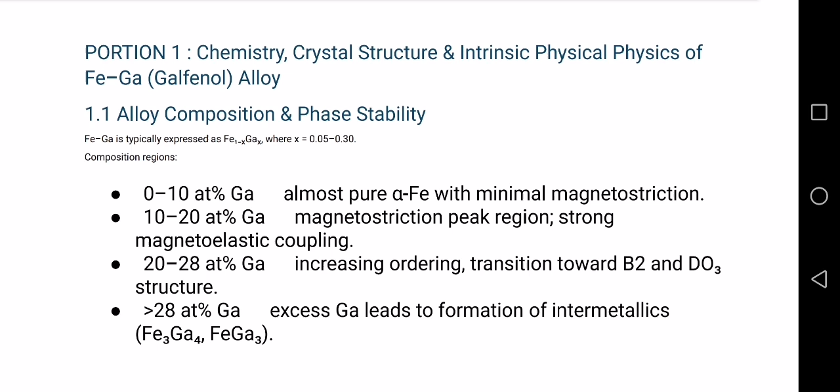We will see the alloy compositions. First I'll talk about the different composition regions. At 0 to 10 atomic percent gallium, the structure is almost pure iron, and magnetostriction is very small here.

When it's 10 to 20 atomic percent gallium, this is the best composition range. Magnetorestriction is maximum and magnetoelastic coupling is very strong.

At 20 to 28 atomic percent gallium, atomic ordering starts to increase, and the structure changes toward B2 and DO3 phases. Magnetorestriction starts to decrease, and if we have more than 28 atomic percent gallium, unwanted intermetallic compounds form like Fe3Ga4 and FeGa3. These phases damage magnetostriction behavior.

For practical application, 17 to 19% is preferred. Now we will see chemical and electronic structure effects.

Gallium changes the electronic structure of iron. The main electronic effect is a weakening of iron-iron interaction. This happens because gallium atoms replace some iron atoms, which makes the magnetic moments more easily able to rotate.

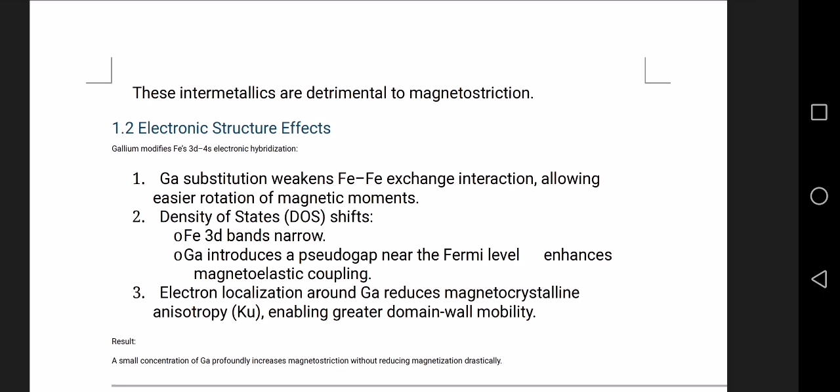Reduced magnetic anisotropy occurs as electrons become more localized near gallium atoms. Magnetocrystalline anisotropy decreases and domain walls move more easily. Finally, even a small amount of gallium greatly increases magnetostriction without significantly reducing magnetization.

Now, the crystal structure of FeGa alloy. It has a body-centered cubic, BCC, structure. Depending on the gallium arrangement, three types of structures appear.

The A2 structure is disordered BCC, where gallium atoms are randomly placed in the iron lattice. This structure shows the highest magnetostriction, easy domain wall motion, and strong mechanical strength. This is the most desired structure for applications.

The next structure is the B2 structure, partially ordered. Gallium atoms in this structure start to occupy specific lattice positions. Structural stability improves and magnetostriction slightly decreases, usually after controlled heat treatment.

Next we have the DO3 structure, which is fully ordered. This structure is similar to Fe3Ga. Atomic order is very strong in this structure. Magnetorestriction becomes low because the domain walls cannot move freely. Internal stresses increase, and this structure is not preferred in magnetorestrictive devices.

Now, why does atomic ordering reduce magnetostriction? This is because magnetostriction is high when domain walls move easily and the lattice is soft and flexible. DO3 ordering causes antiphase boundaries, internal stresses, and strong domain wall pinning.

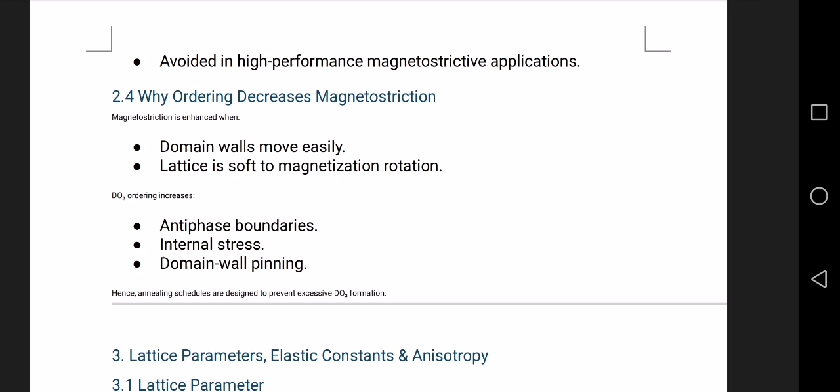Now we have the lattice parameters, elastic constants, and anisotropy. The lattice parameter for FeGa with about 20% gallium is 2.90 to 2.92 angstrom. Pure iron has a smaller value, 2.866 angstrom. Gallium increases the lattice size, which reduces elastic stiffness and makes deformation easier.

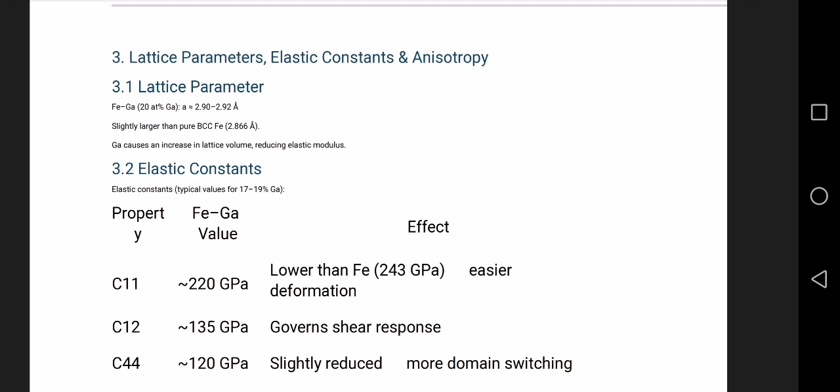Elastic constants of FeGa alloy: typical values for 17 to 19% gallium. C11 is 220 GPa, lower than pure iron, which allows easier deformation. C12 is approximately 135 GPa, which controls shear behavior. C44 is 120 GPa, slightly reduced, and helps domain switching.

Now the overall effect: lower elastic constants mean less energy is needed to create strain, and this leads to higher magnetostriction. To conclude, FeGa alloy is chemically simple but physically powerful.

Small gallium addition greatly improves magnetostriction, and the disordered A2 structure is the best one. Atomic ordering and intermetallics reduce performance. A soft lattice and low anisotropy enable a strong magnetoelastic response.

Now moving on to the next topic, we have magnetostriction physics in FeGa in depth.

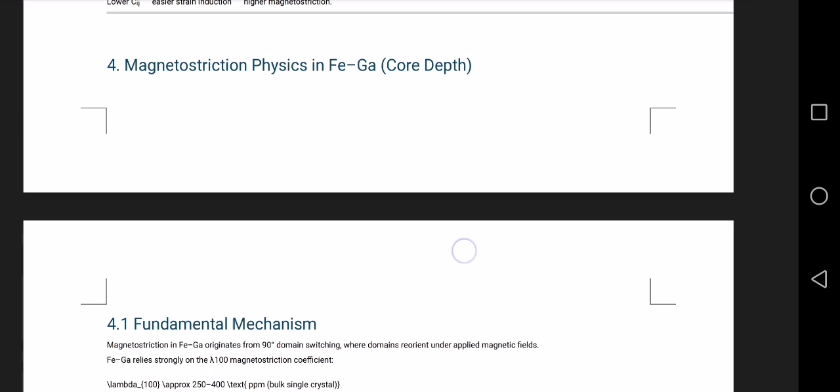Now everyone, this is the heart of today's topic, so please focus carefully. We are going to understand why FeGa alloys show such high magnetostriction. Magnetostriction in FeGa mainly happens because of 90-degree domain switching. Let me explain what this means.

Inside the material, magnetic domains are already present, each with magnetization in a certain direction. When we apply a magnetic field, domains aligned with the field grow, and domains at 90 degrees rotate and reorient. This 90-degree rotation produces a large strain in the lattice.

Remember this important point: FeGa is dominated by the lambda 100 magnetostriction coefficient. This means maximum strain occurs along the 100 crystallographic direction.

For bulk single crystal FeGa, lambda 100 is approximately 250 to 400 parts per million. This is extremely high for an alloy without a rare earth element.

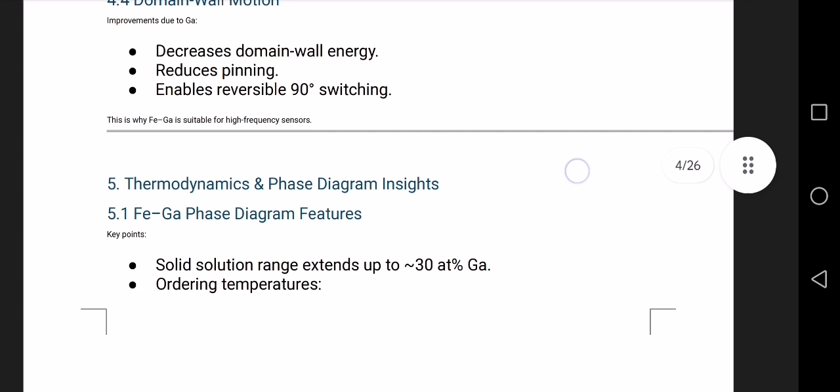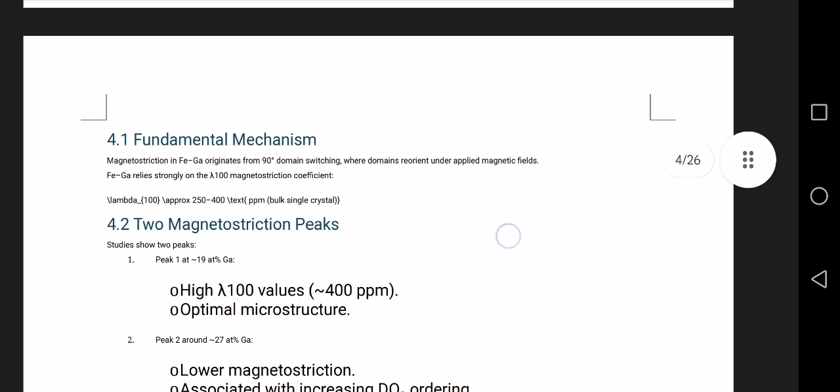Now we're going to discuss magnetocrystalline anisotropy in FeGa, denoted as K1. For FeGa, K1 is approximately 2 to 8 x 10^4 joules per meter cube. This value is much lower than many magnetic materials.

Now let's see why K1 is important. Because K1 is low, magnetic moments rotate easily, less magnetic field is required, and magnetostriction occurs at low excitation. So low K1 leads to high sensitivity and low power requirement. This is very important for zero power sensors.

Now we will discuss domain wall motion in FeGa. Gallium improves domain behavior in three main ways. Let us discuss these three main ways.

First, domain wall energy decreases, so walls move easily. Pinning centers reduce, giving less resistance to motion. Reversible 90-degree switching becomes possible, and high frequency response is achieved. That is why FeGa works very well in high frequency sensors and harvesters.

Now we have thermodynamics and phase diagram insights. Let us look at the important features of the FeGa phase diagram.

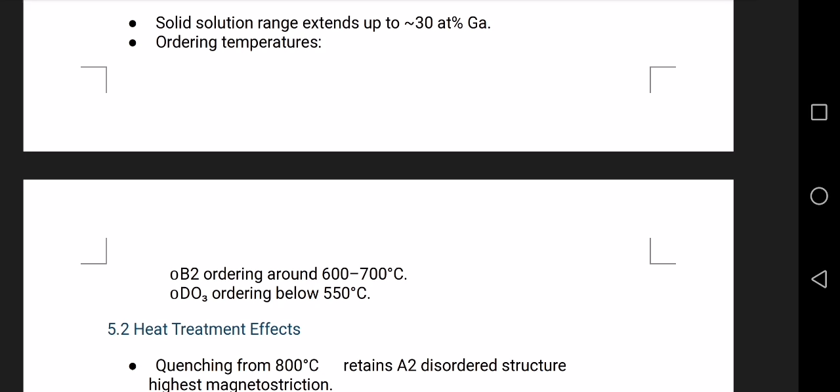The FeGa phase diagram shows that solid solution exists up to 30% gallium. Atomic ordering depends on temperature: B2 ordering starts around 600 to 700 degrees C, and DO3 ordering starts below 550 degrees C. From this data we know that temperature control is extremely important.

Now we will discuss the effect of heat treatment, which strongly controls magnetostriction. Quenching from 800 degrees Celsius retains the A2 disordered structure, giving the highest magnetostriction. Annealing at 400 to 500 degrees C gives limited DO3 ordering and moderate magnetostriction. Long annealing at 350 to 450 degrees C gives excessive DO3 ordering and a severe drop in lambda 100.

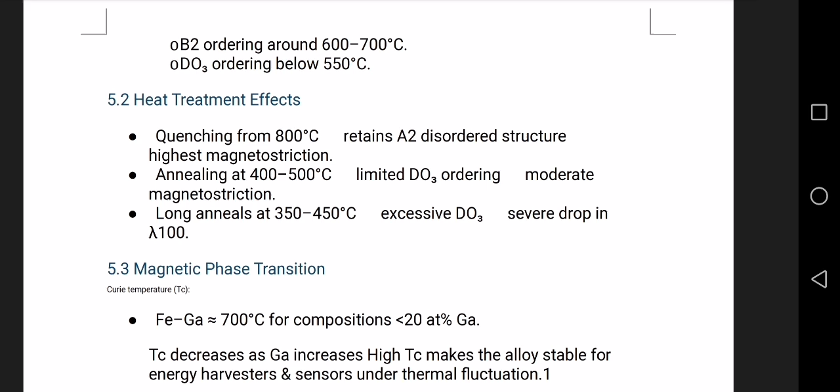Now we will see the magnetic phase transition. Let us talk about Curie temperature, Tc. For FeGa, Tc is approximately 700 degrees C for compositions below 20% gallium. As gallium content increases, Tc slowly decreases.

Why is high Tc important? Because materials remain magnetic at high temperature, making them stable under thermal fluctuation. This is excellent for energy harvesting in sensors.

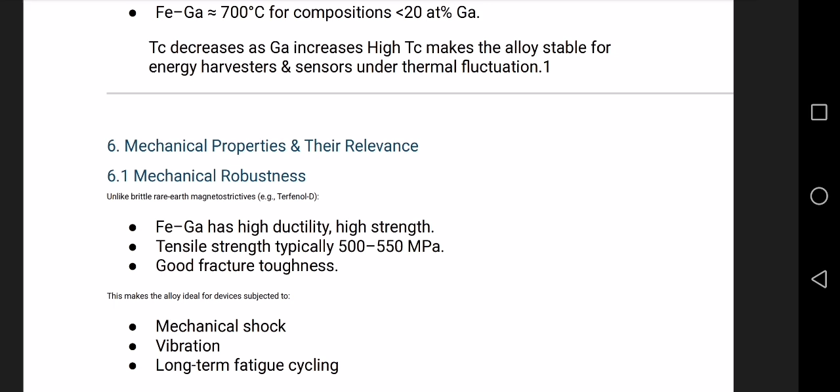Now we have mechanical properties and their importance: mechanical robustness. Let us compare FeGa with rare earth magnetostrictive materials. Unlike brittle materials like Terfenol-D, FeGa has high ductility, high strength, and good fracture toughness. Typical values are tensile strength 500 to 550 MPa, yield strength 320 to 350 MPa. This means FeGa can survive real world conditions like mechanical shocks, continuous vibration, and long-term fatigue loading.

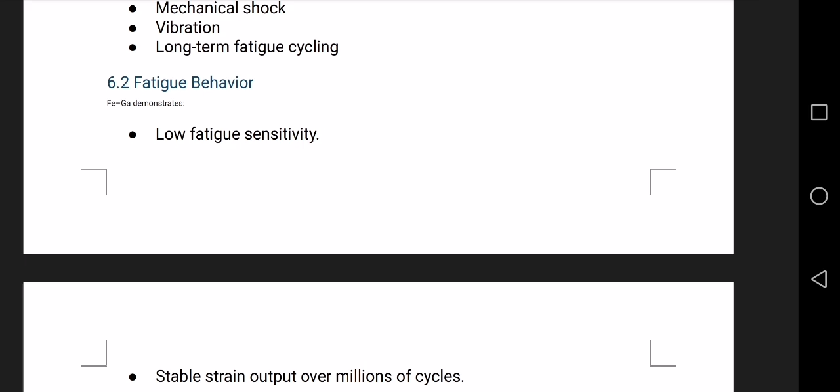What is fatigue behavior? FeGa shows low fatigue sensitivity, stable strain output over millions of cycles, and the internal friction Q inverse remains low. This is very important when FeGa is combined with a TENG system, because energy conversion remains efficient and mechanical losses are minimum.

Now we have thin film versus bulk FeGa. In thin films less than 50 nanometers, magnetoelastic coupling increases, substrate strain can control anisotropy, and very small magnetic fields are sufficient.

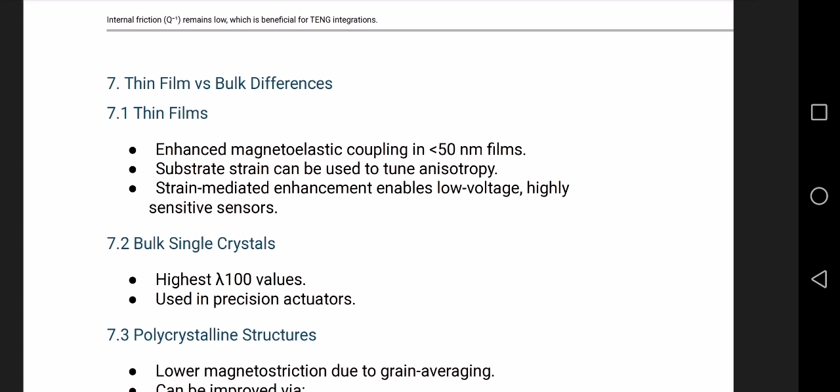This allows extremely sensitive low voltage sensors. Now we have bulk single crystals. Bulk single crystals show highest lambda 100 values, very precise strain response, and are used in precision actuators, laboratory reference devices. Next is the polycrystalline FeGa.

Polycrystalline materials show low magnetostriction due to grain averaging. However, performance can be improved by texturing, rolling, annealing, and directional solidification.

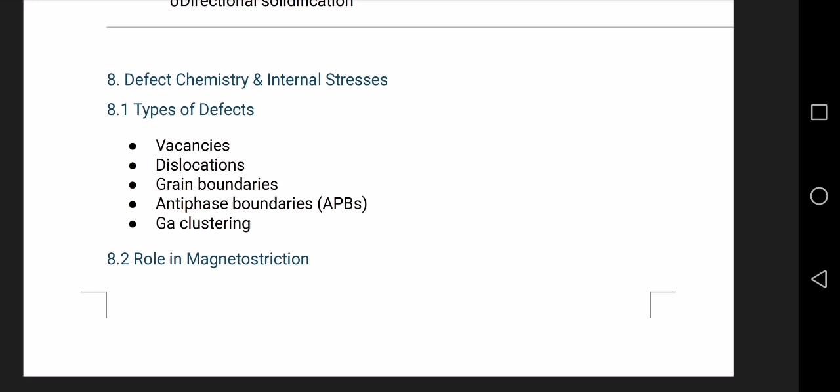Defect chemistry and internal stress. Now let's see what types of defects exist. Common defects include vacancies, dislocations, grain boundaries, antiphase boundaries, and gallium clustering. What is their role in magnetostriction and what is their effect? Antiphase boundaries strongly pin domain walls. Grain size affects coercivity and permeability, so defects must be carefully controlled.

Now we have their roles in sensors and energy harvesters. For TENG and self-powered sensors, we want low coercivity, low energy input, high permeability, strong responses, low internal friction, and high efficiency.

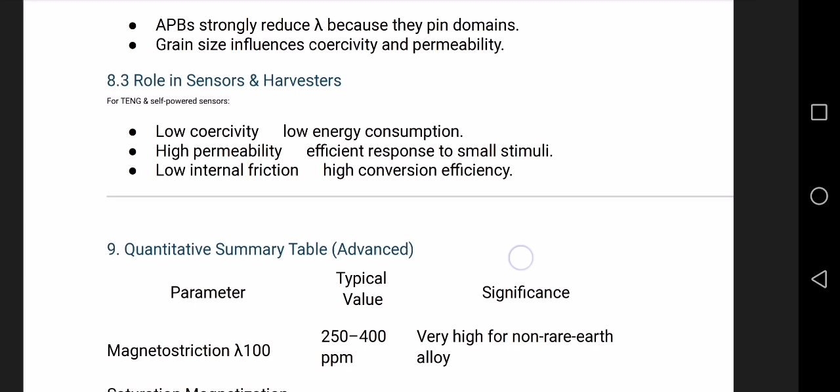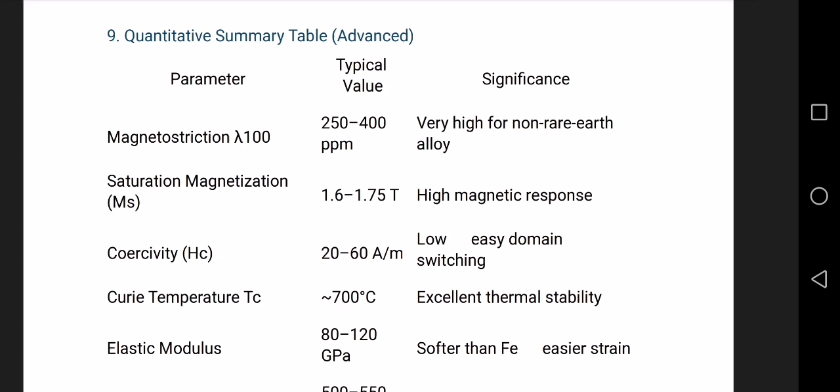Let us quickly go through the quantitative summary and important numbers. Magnetostriction value, lambda 100, is 250 to 400 ppm, very high for a non-rare earth alloy. Saturation magnetization is 1.6 to 1.75 Tesla, a strong magnetic response. Coercivity is 20 to 60 A/m, allowing easy domain switching. Curie temperature is 700 degrees C, showing excellent thermal stability.

Elastic modulus is 80 to 120 GPa, softer than pure iron. Tensile strength is 500 to 550 MPa, mechanically robust. Electrical resistivity is 20 to 25 micro-ohm centimeter, giving moderate eddy current losses.

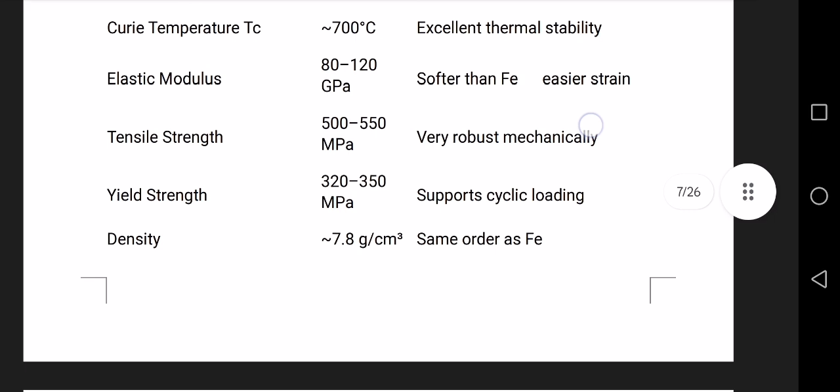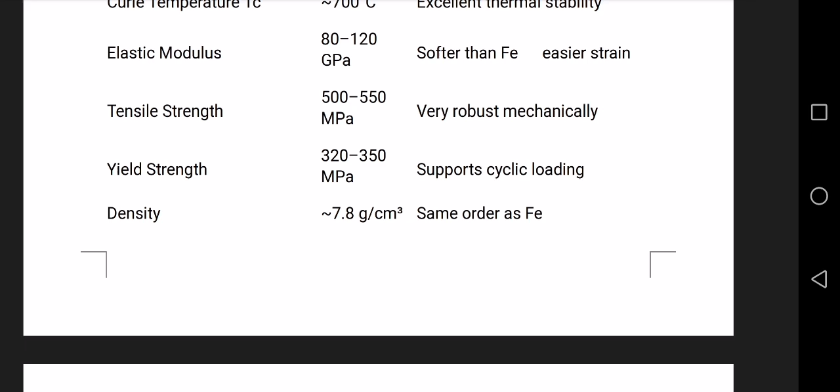So everyone, FeGa alloy is a rare combination of magnetic, mechanical and thermal stability. Keep in mind these three things: magnetic, mechanical and thermal stability. Its high magnetostriction, low anisotropy and strong mechanical properties make it ideal for modern technologies like triboelectric energy harvesting and zero power sensors. In the next part we'll connect this material directly to the TENG working mechanism and self-powered sensing systems.

Now, deep reasons why FeGa is used in TENGs and zero power sensors. Before we move fully into manufacturing, let us pause and understand why FeGa is so special for triboelectric nanogenerators and zero power sensors. Everything we studied so far, magnetostriction, domain motion, low anisotropy, mechanical strength, now comes together.

Reason 1 is magnetomechanical transduction. FeGa can convert mechanical vibration into magnetic change and also convert magnetic excitation into mechanical strain. This two-way coupling is extremely strong in FeGa. So in TENGs and sensors, tiny vibrations drive domain switching into electrical signal, and no external power is needed.

The second reason is sensitivity to nanoscale strain. FeGa responds to very small strains even at nanoscale. Why? Because of low magnetocrystalline anisotropy, easy domain rotation and high lambda 100 coefficient. This means even weak human motion, environmental vibration, or structural bending can be easily detected.

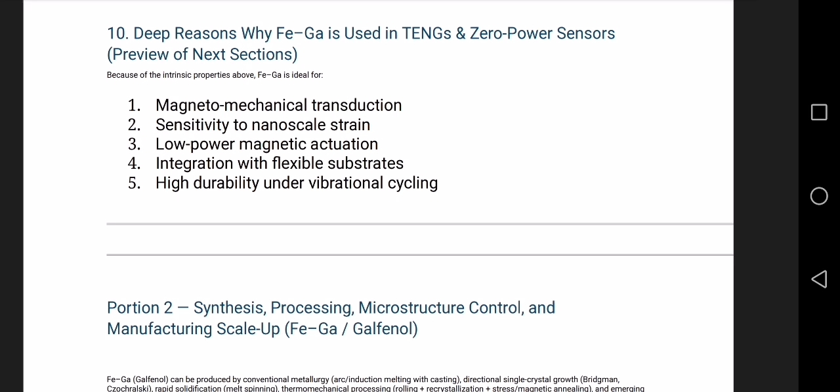Now in portion 2, synthesis, processing, microstructure control and manufacturing. Let us move to portion 2, where we will see how FeGa is actually made, processed and scaled up for real devices.

Here is a little overview of manufacturing routes. FeGa can be produced using several routes: conventional metallurgy, single crystal growth, thermomechanical processing, rapid solidification, and additive manufacturing. But remember, final properties depend more on processing than chemistry alone.

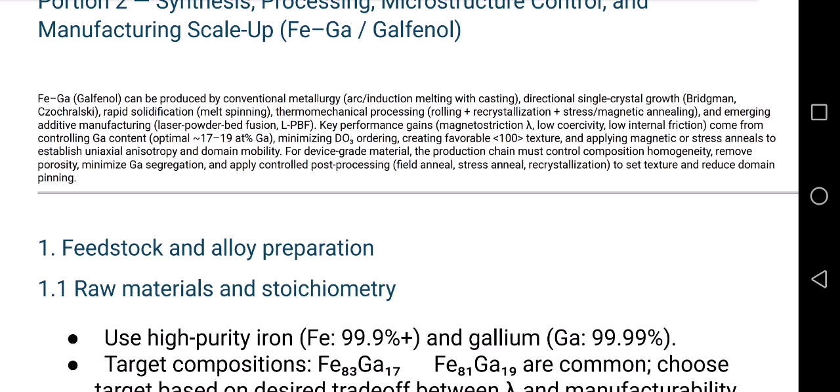First we have feedstock and alloy preparation, raw materials and stoichiometry. We always start with raw materials. For high quality FeGa, iron purity should be greater than or equal to 99.9%, and gallium purity should be greater than 99.99%. Typical target compositions are Fe83Ga17 and Fe81Ga19. These compositions balance high magnetostriction and good manufacturability.

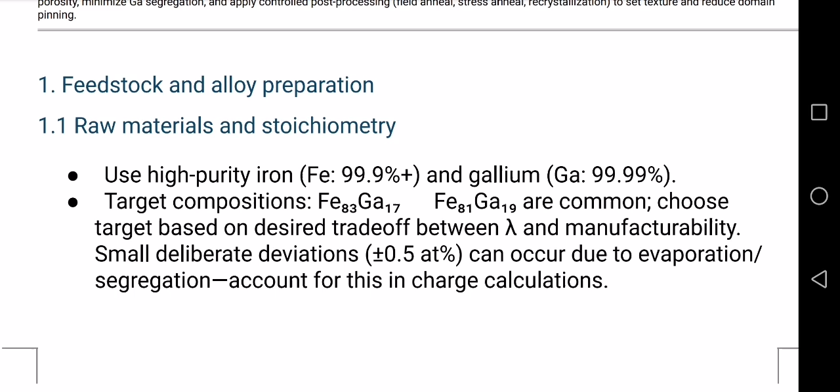One important practical issue to remember is that gallium can evaporate and segregate during melting. So small deviations of less than 0.5% are expected, and engineers compensate during charge calculation. Now we have melting and homogenization.

Common melting methods are arc melting, vacuum induction melting, or induction melting under argon. Melting temperature should typically be 1400 to 1550 degrees Celsius to ensure uniform composition. Melt and flip cycle at least 3 times. After melting, cast into ingots and prepare for homogenization annealing.

Temperature should be 900 to 1000 degrees Celsius. Time should be 12 to 48 hours. Atmosphere should be inert or low oxygen. The purpose is to remove chemical segregation and dissolve unwanted intermetallics.

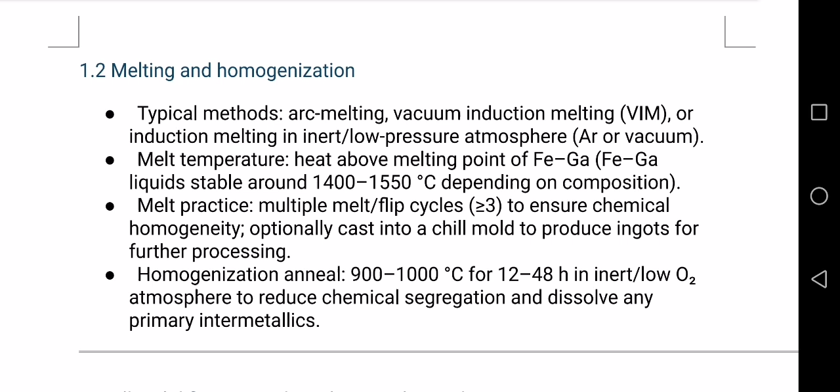Next point: bulk solidification and single crystal growth, including Bridgman and Czochralski growth. Single crystals are grown because they show the highest magnetostriction and have no grain boundaries to pin domains.

Vertical Bridgman method: slow translation 0.5 to 5 mm per hour, strong thermal gradient, controlled cooling to avoid Ga segregation. In the second method, pulling rate is 1 to 10 mm per hour, and controlled rotation with atmosphere control is critical. After growth, cool it down very slowly, cut it into crystals, and orient them along 100 directions.

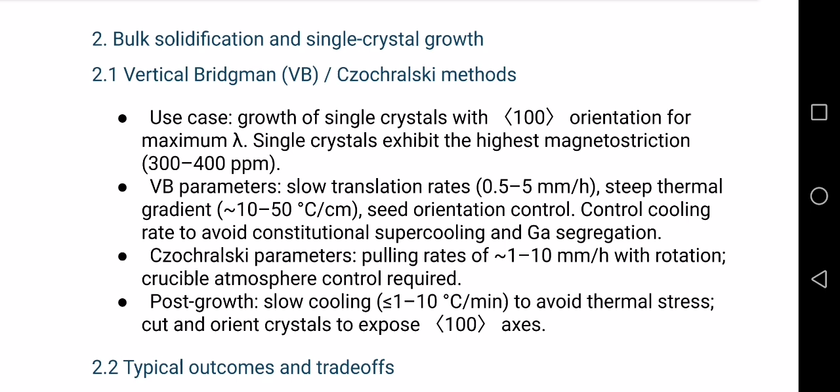Now the trade-offs of single crystals: advantages are lambda-100 up to 400 ppm and excellent domain mobility. Disadvantages are that it is very expensive, time consuming, and limited in size. So single crystals are mainly used in research and precision actuators.

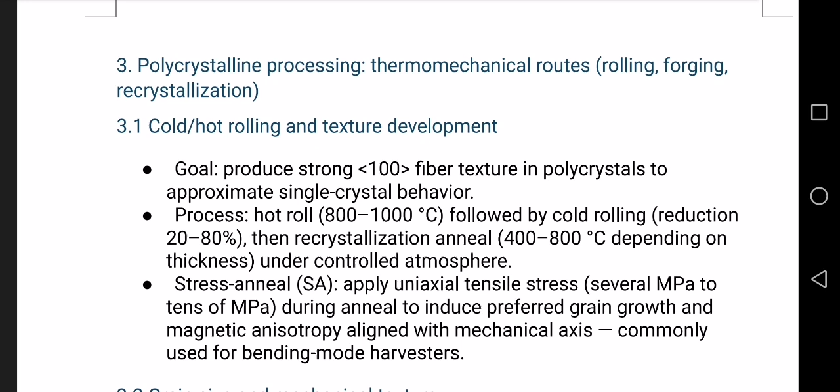Now we have polycrystalline processing, or thermomechanical routes, including rolling and texture development. For large scale production, we mostly use polycrystals. The goal is to create 100 texture and mimic single crystal behavior.

What are its process steps? First, hot rolling at 800 to 1000 degrees Celsius. Cold rolling with 20 to 80% reduction. Recrystallization anneal at 400 to 800 degrees Celsius. Then stress annealing during annealing.

Stress annealing: apply uniaxial stress of a few megapascals to tens of megapascals. This causes preferred grain growth and induced magnetic anisotropy, used especially for bending mode energy harvesters.

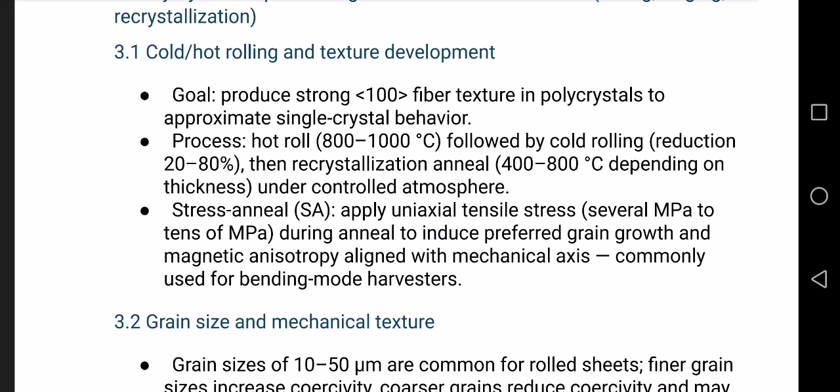Grain size control: typically grain size is 10 to 50 micrometers. Smaller grains have higher coercivity, larger grains have lower coercivity and better low frequency response. So grain size is optimized based on device design.

Next we have rapid solidification and melt spinning. What is the process of melt spinning? Molten alloy is ejected onto a rotating copper wheel.

Key parameters are: wheel speed should be 15 to 40 meters per second, ribbon thickness should be 20 to 50 micrometers, and atmosphere should be argon.

What are its advantages? Advantages are very fine microstructure, suppressed atomic ordering, and high potential magnetostriction. Applications are in sensor ribbons and feedstock for powder.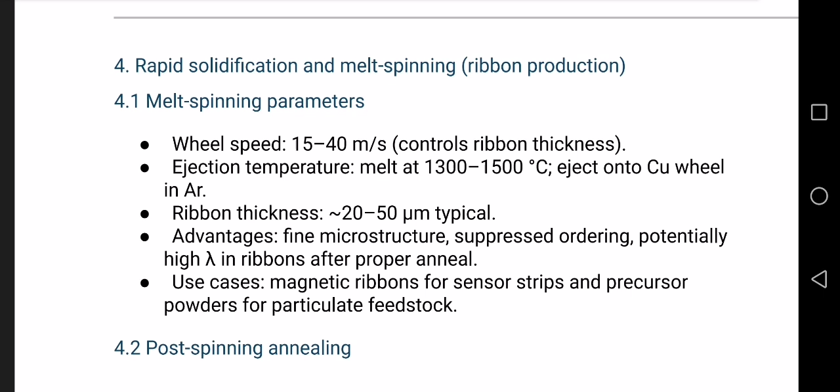Post spinning annealing: after spinning, anneal at 300 to 500 degrees Celsius for 5 to 60 minutes. The purpose is to relieve internal stress and avoid excessive DO3 ordering. Long anneals must be avoided.

Next is additive manufacturing, laser powder bed fusion. Why additive manufacturing? This is a very modern and important topic. LPBF allows complex shapes, lattices, and rapid prototyping.

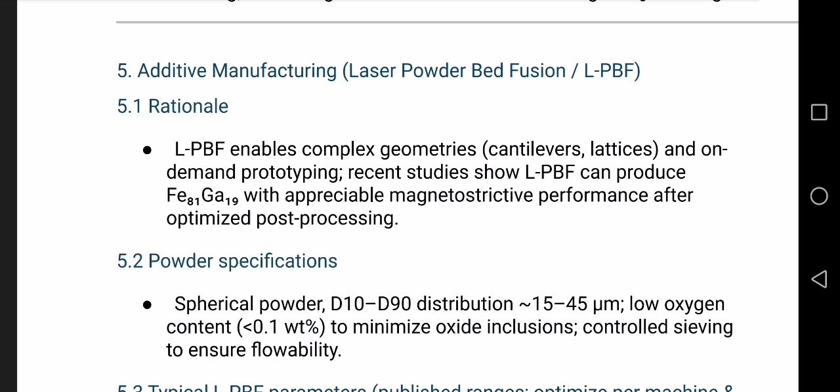Powder requirements: powder must be spherical, particle size should be 15 to 45 micrometers, and low oxygen content less than 0.1%. This ensures good flowability and minimal oxide defects.

Post build heat treatment: after printing, stress relief anneal at 300 to 600 degrees Celsius for a duration of 1 to 4 hours.

Magnetic field annealing: apply a magnetic field during anneal, field range should be 0.1 to 10 Tesla. Effect is strong texture development; lambda can increase 2 to 5 times.

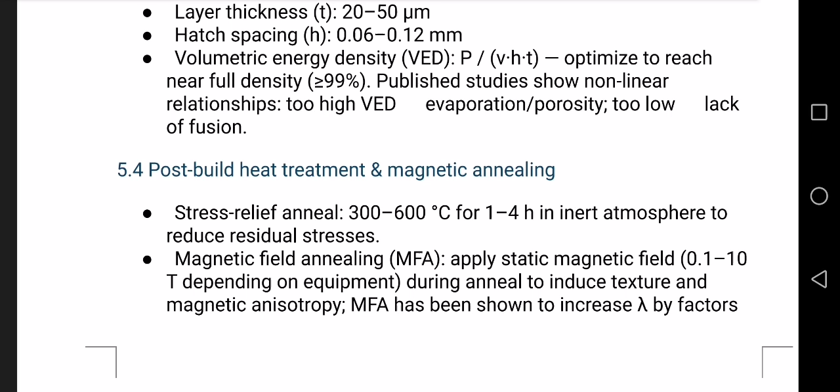Now we have resulting microstructures. The LPBF part shows fine dendritic structures, residual porosity, and possible Ga segregation. So post processing is critical — more critical than the process itself.

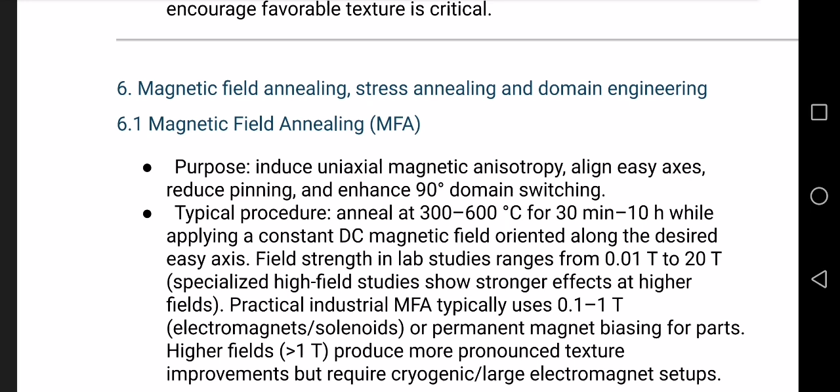We have magnetic field annealing and stress field annealing. Magnetic field annealing's purpose is to induce uniaxial magnetic anisotropy, align the easy axis, and reduce domain pinning. Procedure: anneal at 300 to 600 degrees Celsius, apply a DC magnetic field for 30 minutes to 10 hours. Industrial field is 0.1 to 1 Tesla.

In high field labs, we use fields up to 20 Tesla.

Next we have stress annealing. Its purpose is to couple mechanical and magnetic anisotropy. Typical conditions are stress of a few MPa to tens of MPa, temperature 350 to 500 degrees Celsius, and time 1 to 10 hours. It is used widely for bending mode sensors and highly repeatable devices.

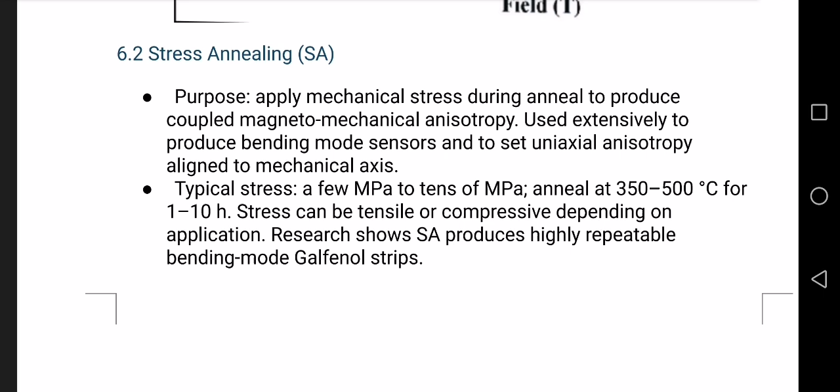Now we have combined MFA and SA. Finally, combining both gives the best results. The benefits are lowest coercivity, highest low field magnetostriction, excellent repeatability, used for final device tuning and high performance harvesters.

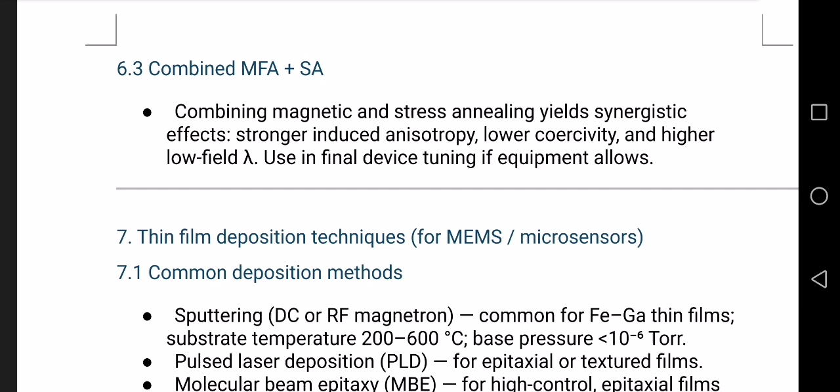Now we have thin film deposition techniques for MEMs and microsensors. Until now we mostly talked about bulk Galfenol materials, but for MEMS devices and microsensors we usually need very thin films. So let us now discuss how Galfenol thin films are made and controlled.

Common thin film deposition methods: first, we have sputtering, DC or RF magnetron sputtering. The most commonly used method for Galfenol thin films is sputtering. In sputtering, a Galfenol target is bombarded with ions, atoms are ejected and deposited on a substrate. Typical conditions are substrate temperature 200 to 600 degrees Celsius, base pressure below 10 raised to power minus 6 torr.

Why is sputtering popular? Because of its good thickness control, uniform films, and compatibility with MEMS fabrication. DC sputtering is used for conductive targets, while RF sputtering is used for better composition control.

Pulsed laser deposition, PLD, is mostly used in research. In PLD, a high energy laser hits a Galfenol target and material is transferred to the substrate. Its advantages are excellent stoichiometry control, good for textured or epitaxial films. Its limitations are small area deposition, not suitable for large scale manufacturing.

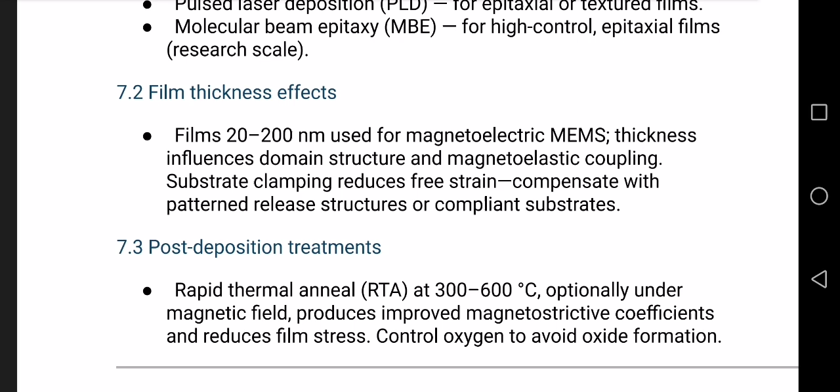Post deposition treatments. After deposition, films are not ready yet. They have residual stress, defects, and poor magnetic anisotropy.

Rapid thermal annealing, RTA. Typical RTA conditions are temperature 300 to 600 degrees Celsius, with short time exposure. Its effects are stress relaxation, improved magnetostriction, and better domain alignment.

Sometimes annealing is done under a magnetic field. This induces preferred magnetic direction and improves low field response. Oxygen control is very important because Galfenol oxidizes easily. Oxides reduce magnetic performance, so annealing is done in vacuum or inert gas.

Characterization and quality control. Now that we have fabricated the material, we must verify its quality.

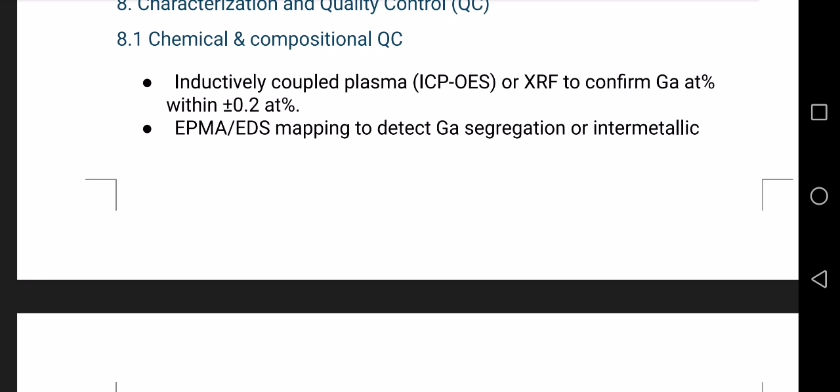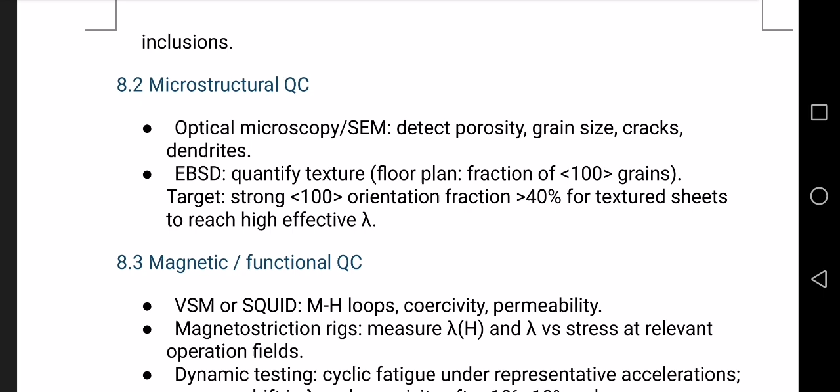Electron backscatter diffraction, EBSD, is very important for FeGa. It tells us grain orientation and texture strength, with a target of 40% of grains oriented along the 100 direction. This gives high effective magnetostriction.

Now we have magnetic and functional testing. Magnetic measurements are done using VSM or SQUID magnetometer, measuring MH loops, coercivity, and permeability. Magnetostriction testing uses special rigs that measure lambda versus magnetic field and lambda versus applied stress. Conditions must match real device operation.

Dynamic and fatigue testing is extremely important for sensors. Its tests include cyclic loading of 10 raised to power 6 to 10 raised to power 8 cycles, measuring drift in lambda and checking coercivity and stability.

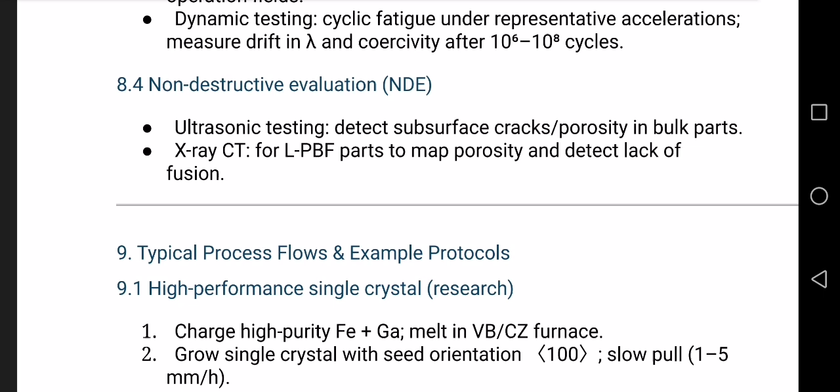Non-destructive evaluation, NDE. Ultrasonic testing is used for bulk materials to detect internal cracks or voids. X-ray computed tomography, CT, is used especially for LPBF parts, and it detects porosity, lack of fusion, and internal defects.

Typical process flows and protocols. Now let us connect everything into a real process flow: high performance single crystal, research scale.

Now let's see the steps. Melt high purity Fe and Ga. Grow single crystal using VB or CZ. Orient along 100 directions, stress relieve at 600 degrees Celsius. Magnetic anneal at 400 to 600 degrees C under 1 to 5 Tesla.

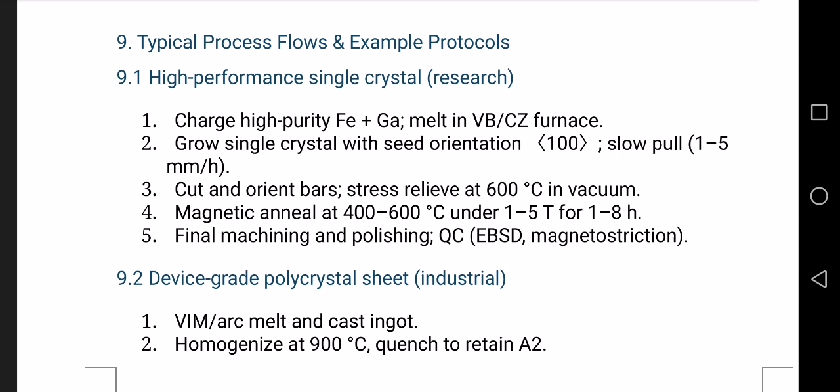Final polishing and QC. Device grade polycrystal sheet industrial steps are: melt and cast ingot. Second, homogenize at 900 degrees Celsius, quench. Number 3, hot roll and cold roll. Number 4, crystallization with stress anneal. Number 5, magnetic field anneal 0.1 to 1 Tesla. Final cutting and QC.

Now, common defects.

LPBF prototyping and post processing. Its steps are: produce spherical powder first. Second, print with optimized energy density. Number 3, stress relieve at 300 to 500 degrees Celsius. Number 4, HIP if needed. Number 5, magnetic and stress annealing. Number 6, final QC, CT, EBSD, magnetostriction.

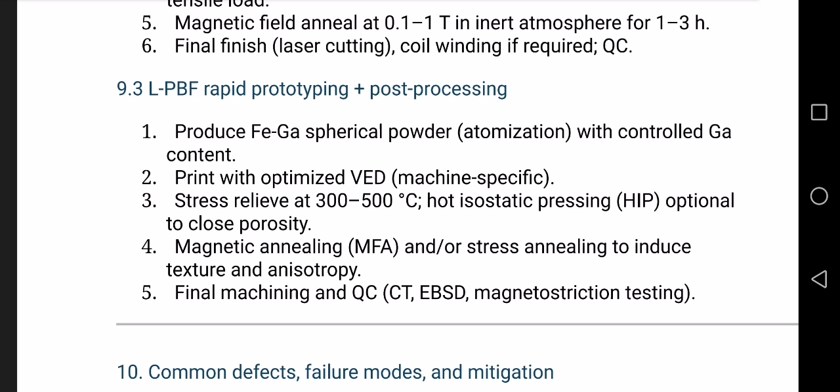Next we have common defects, failure modes, and mitigation. Gallium segregation and intermetallics: caused by slow cooling and poor homogenization; solution is extended annealing and controlled cooling. Excessive DO3 ordering caused by long anneals at intermediate temperatures; solution is quenching, short anneals, and magnetic or stress anneals.

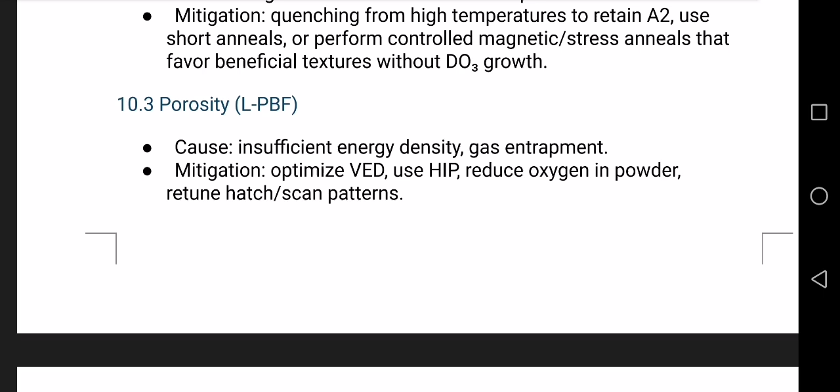Porosity in LPBF parts is caused by low energy density and gas entrapment; solution is to optimize printing parameters, use HIP, and improve powder quality. Oxidation and surface contamination is caused by exposure to air and poor powder handling; solution is inert atmosphere, glove boxes, and protective coatings.

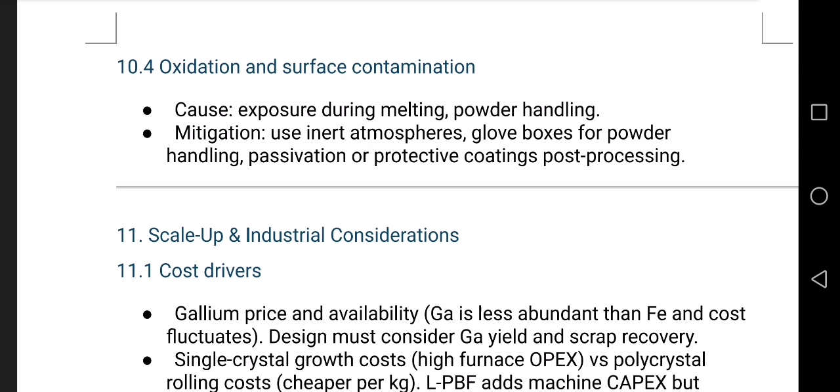Now we have scale up and industrial considerations. Up to now we have discussed FeGa mostly from a scientific and laboratory point of view, but a material is only truly successful if it can be produced at a large scale, safely, and at reasonable cost. So let us talk about what happens when FeGa moves from the lab to the factory.

Cost drivers in FeGa production. Gallium cost and availability is the first and most important cost driver. Iron is extremely abundant and cheap, while gallium is much less abundant. Gallium is often obtained as a byproduct of aluminium or zinc refining. This means gallium price fluctuates strongly and supply can be unstable.

Why does this matter for FeGa design? Because FeGa magnetostriction is highly sensitive to gallium content. Wasting gallium during processing directly increases cost. Therefore, industrial design must consider high gallium yield, efficient scrap recovery, minimal oxidation loss, and single versus polycrystalline cost comparison.

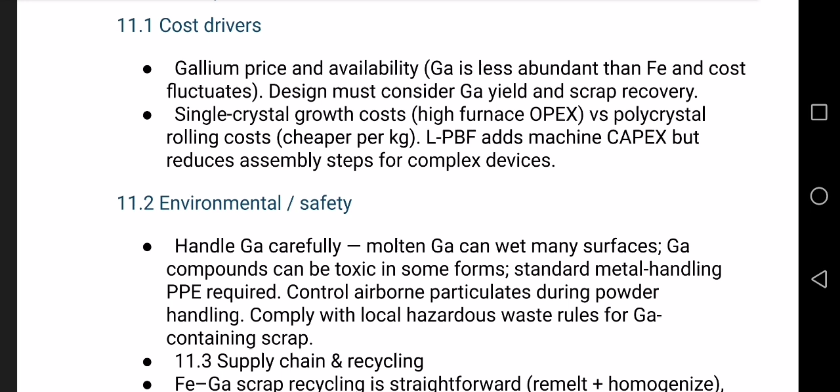Now let us compare different production routes. These routes include vacuum controlled atmosphere furnaces with long growth times, millimeter per hour growth rates, very high operating expenses (OPEX), and very high energy consumption. Advantages are high magnetostriction and best performance. Disadvantages are very expensive per kg and not suitable for mass production.

Polycrystalline rolling route: casting, rolling, annealing, much cheaper per kilogram, uses standard steel processing infrastructure. Advantages are good mechanical properties, scalability, and cost effectiveness. That is why most industrial FeGa components are polycrystalline.

Additive manufacturing economics. Additive manufacturing changes the equation because it has high capital cost for machines (CAPEX) and powder preparation is very expensive, but it enables complex geometries, reduces assembly steps, and integrates multiple functions into one part. So higher upfront cost but lower system level cost for complex devices.

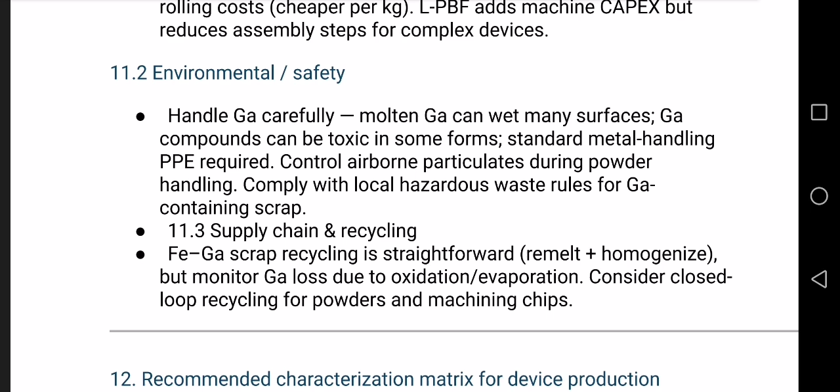Now we have supply chain and recycling strategy. Recycling FeGa scrap: the good news is that FeGa recycling is relatively easy.

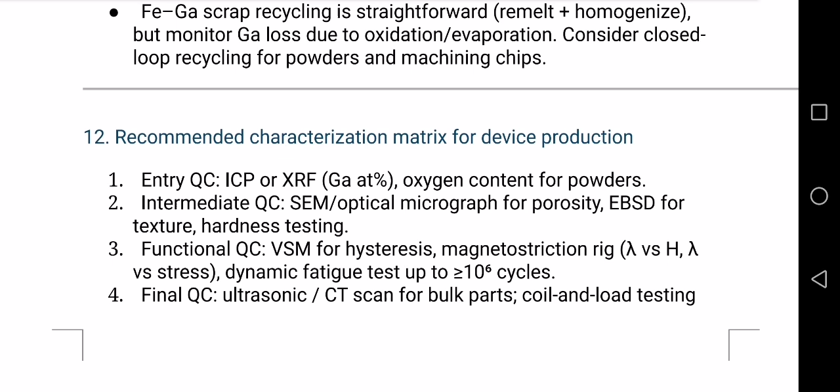Scrap can be remelted, homogenized, and used. This includes machining chips, off-spec parts, and powder leftovers. Gallium loss issues stem from main loss mechanisms like oxidation at high temperature and evaporation during melting. Mitigation includes controlled atmosphere melting, protective slag or flux, short melt times, and closed loop recycling. Modern manufacturing prefers closed loop systems.

Closed loop recycling means scrap is collected, composition is monitored, and material is reused internally. This reduces cost, stabilizes composition, and improves sustainability.

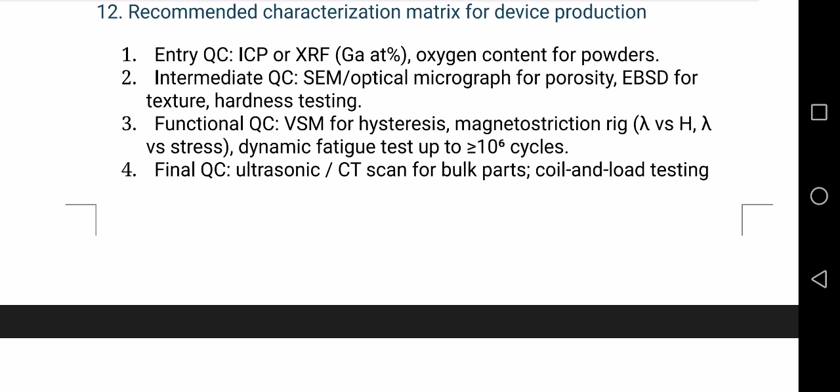Now we have recommended characterization matrix for device production. Finally, let us talk about quality control, because no device survives without QC. This is not just testing, this is risk management.

Entry quality control: incoming materials, chemical composition verification. At the start, ICP-OES or XRF confirm Ga atomic percent tolerance, very tight, typically 0.2 at percent. Oxygen content, especially for powders, increases brittleness and reduces magnetic response. Therefore, oxygen analysis is mandatory for powders.

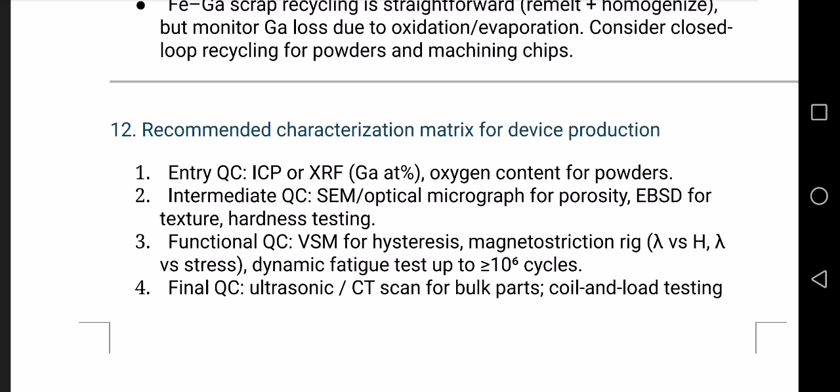Intermediate quality control during processing happens through microstructural inspection using optical microscopy and SEM to detect porosity, cracks, and inhomogeneous grains. Texture management is done using EBSD, checking the fraction of 100-oriented grains and grain size distribution. This directly predicts final magnetostriction performance. Next we have mechanical screening.

Hardness testing detects over ordering, excessive brittleness, and improper heat treatment quality.

Functional quality control is done using VSM, hysteresis loops, coercivity, saturation magnetization, and magnetostriction testing. Critical tests include lambda versus magnetic field and lambda versus applied stress.

Dynamic fatigue testing is essential for energy harvesters and sensors: cyclic loading up to 10 to the power of 6 cycles or more, monitoring drift in lambda, change in coercivity, and mechanical degradation.

Final quality control involves non-destructive testing for bulk parts: ultrasonic inspection, X-ray, and CT for complex geometries, detecting internal cracks, porosity, and lack of fusion.

Device level testing for harvesters and sensors includes coil and load testing, measuring power output, frequency response, and stability over time. This confirms the material works as part of a system, not just alone.

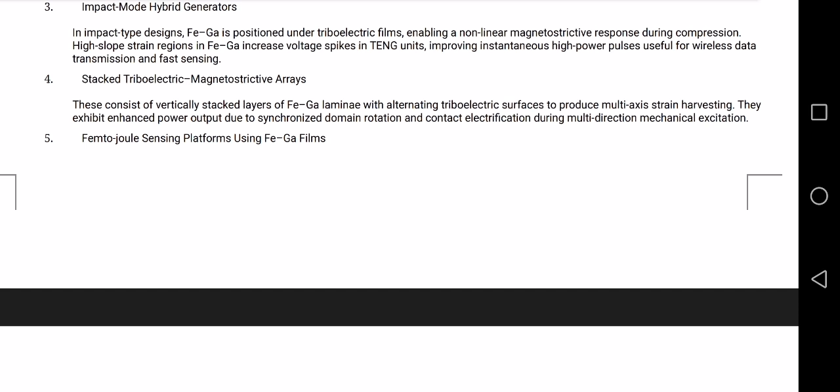Number 5 is femtojoule sensing platforms using FeGa thin films. These films are used in MEMS and micro TENG devices, producing very small but stable signals suitable for IoT devices, biomedical patches, and micro monitoring systems. They operate with zero external power.

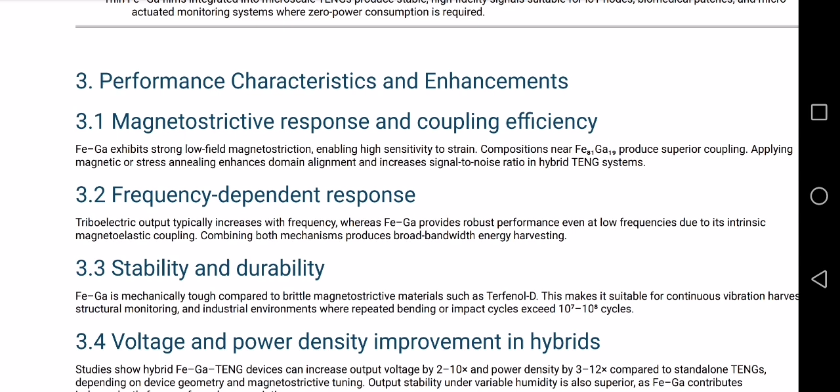Next, we have performance characteristics and enhancements. Magnetostrictive response and efficiency: FeGa shows strong response at low magnetic fields, best composition being Fe81Ga19. Performance is enhanced by magnetic annealing and stress annealing. These processes align magnetic domains and increase signal to noise ratio.

Frequency dependent response: triboelectric output increases with frequency, while FeGa response is stronger even at low frequency. Combined, these systems harvest energy over a wide frequency range.

Stability and durability: unlike brittle materials like Terfenol-D, FeGa is mechanically tough. It can withstand continuous vibration and repeated bending for 10 to the power 7 to 10 to the power 8 cycles, making it ideal for industrial monitoring, long-term deployment, voltage and power enhancement.

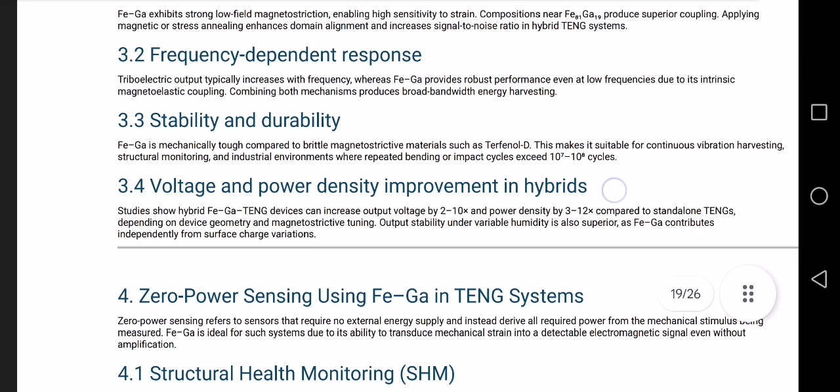Experimental studies show voltage increases significantly, and power density increases by 3 to 12 times compared to standalone TENGs. The output is also more stable under humidity changes.

Zero power sensing using Fe-Ga-TENG systems. What is zero power sensing? It means the sensor does not need a battery; it uses energy from the environment. Fe-Ga enables this because it produces detectable signals without amplification.

Structural health monitoring: hybrid sensors detect cracks, load changes, beam deformation, and vibration patterns. Fe-Ga identifies deformation modes while TENG measures event intensity.

Human motion and biosensing: flexible patches detect joint motion and sense muscle vibration. Signals can be directly processed by ultra low power circuits.

Passive wireless sensing: Fe-Ga modulates magnetic or RF circuits, and combined with TENG, enables wireless data transmission without batteries.

Environmental and vibrational monitoring is used for machinery monitoring, railway tracks, flow sensing, and pressure variation detection. High fidelity comes from the combined magnetoelastic and triboelectric effect.

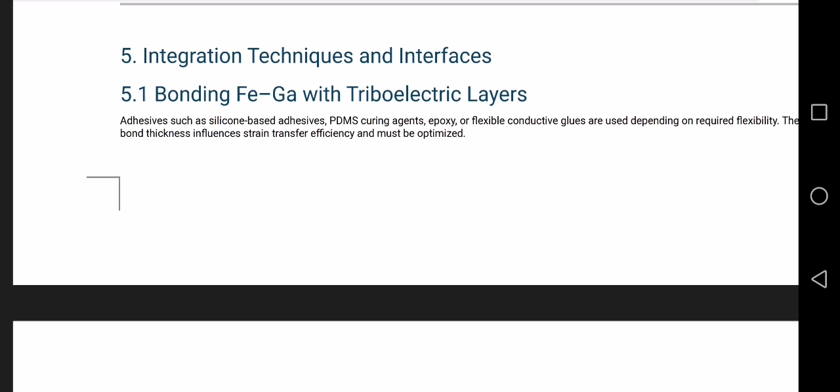Integration techniques and interfaces: bonding Fe-Ga with triboelectric layers. Bonding materials include silicone adhesives, PDMS, epoxy, and conductive glues. Bond thickness controls strain transfer and must be optimized.

Coil integration: copper coils capture magnetic flux variations. Performance depends upon number of turns, core geometry, and annealing orientation.

Surface engineering: surface roughness is improved by laser texturing, sandblasting, and lithography. This increases contact area and enhances triboelectric output.

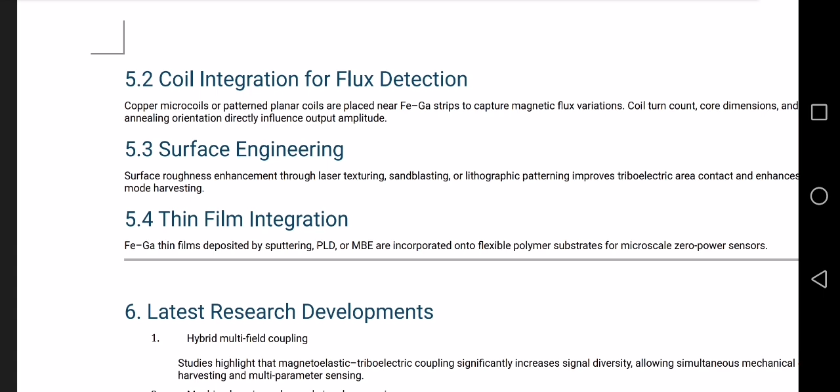Thin film integration: Fe-Ga thin films deposited by sputtering, PLD, or MBE are integrated onto flexible substrates used in microsensors.

Latest research developments: multi-field coupling. Hybrid systems show mechanical, magnetic, and electrical coupling, which allows multi-parameter sensing.

Machine learning integration: AI algorithms analyze complex signals, predict mechanical failure, and enable smart maintenance.

Additive manufacturing advances: LPBF printed Fe-Ga combined with magnetic annealing enables complex 3D harvesters.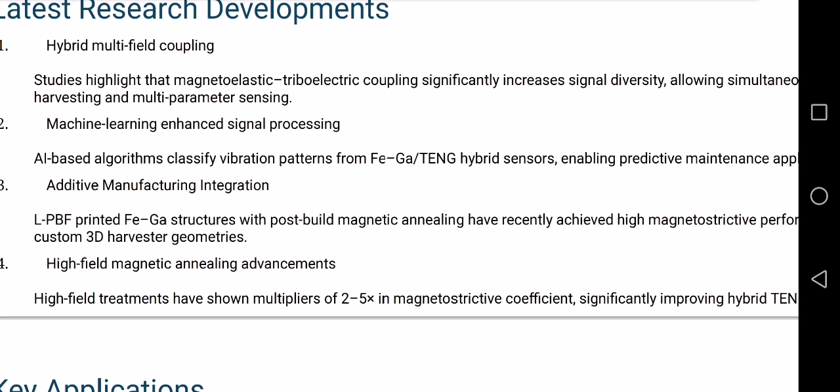High field magnetic annealing increases magnetostriction by 2 to 5 times, dramatically improving TENG performance.

FeGa does not convert energy itself; it connects mechanics, magnetics, and electronics into a single smart mechanical system. That is why it plays a central role in next generation energy harvesters and zero power sensors.

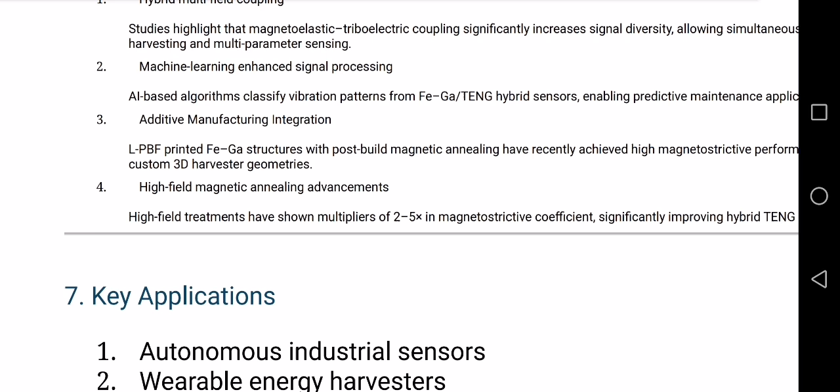That was the conclusion of this topic, and now we will move on to the key applications of FeGa based hybrid systems. Before moving to advanced research directions, let us first clearly understand why these are actually used.

FeGa based hybrid systems are applied in many real world technologies, including autonomous industrial sensors that monitor machines without batteries.

Number 2: wearable energy harvesters. These are devices that generate power from human motion.

Number 3: smart infrastructure monitoring. It builds into bridges, buildings, pipelines, and railways.

Number 4: IoT networks and passive wireless nodes. It creates sensors that communicate without external power.

Number 5: zero power accelerometers, motion sensors powered only by vibrations.

Number 6: self-powered robotic skins. It creates artificial skins that feel pressure and movements.

Number 7: smart tires and vehicle vibration detection for real-time road and vehicle condition monitoring.

Number 8: spacecraft micro vibration harvesters, which help harvest tiny vibrations in satellites.

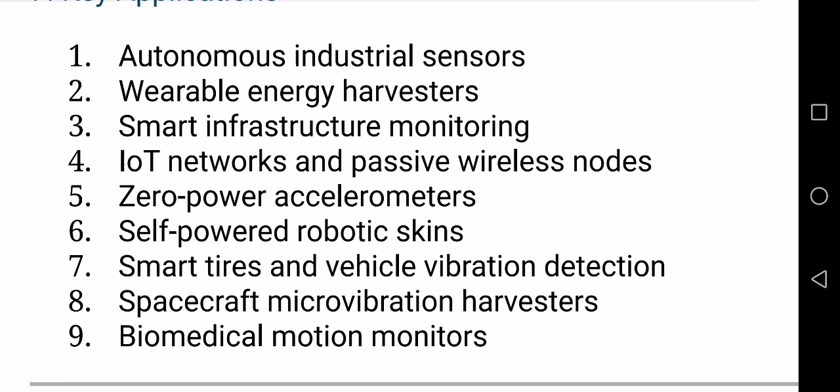In portion 4, we cover advanced research directions, AI intersection, sustainability regulations, and the research roadmap.

In this portion, we will look beyond today's devices. We will see where FeGa research is going in the future, how artificial intelligence is involved, and how sustainability and regulations shape real deployment. This portion connects material science, manufacturing, artificial intelligence, sustainability, policy, and ethics.

Advanced technical frontiers: materials and processing.

Additive manufacturing: LPBF of FeGa. Let us start with manufacturing. Laser powder bed fusion uses a laser to melt FeGa powder layer by layer, enabling complex 3D geometries. Recent progress shows LPBF can now produce Fe81Ga19 with controlled grain structure and strong magnetostriction.

However, printing alone is not enough, because LPBF creates residual stress, porosity, and dendritic microstructures. Therefore, post-processing is essential, including hot isostatic pressing (HIP), stress relief annealing, recrystallization, and magnetic or stress annealing. With optimized post-processing, printed FeGa parts can approach single crystal performance.

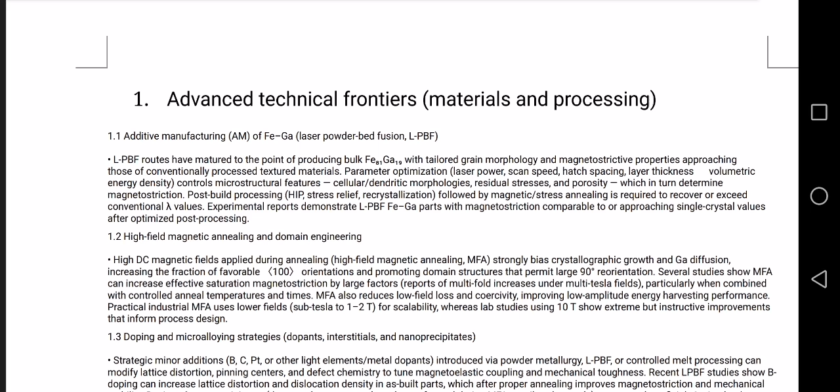Next we have high-field magnetic annealing. In magnetic field annealing, we anneal FeGa while applying a strong DC magnetic field. This biases crystal growth, aligns favorable 100 orientations, and promotes easy 90-degree domain rotation. Research shows magnetostriction can increase by multiple times, coercivity decreases, and low-field efficiency improves.

Industrial reality: industry uses sub-Tesla to 1-2 Tesla fields. Labs may use 10 Tesla fields for extreme optimization. High field studies teach us how to design scalable industrial processes.

Doping and microalloying strategies: another exciting research direction is microalloying. Small additions such as boron, carbon, and platinum can distort the lattice, modify defects, and improve domain motion. For example, boron doping in LPBF FeGa increases dislocation density after annealing, improves magnetostriction, and improves mechanical stability. Nanoprecipitates act as controlled pinning centers, improving reversible domain motion and reducing energy losses.

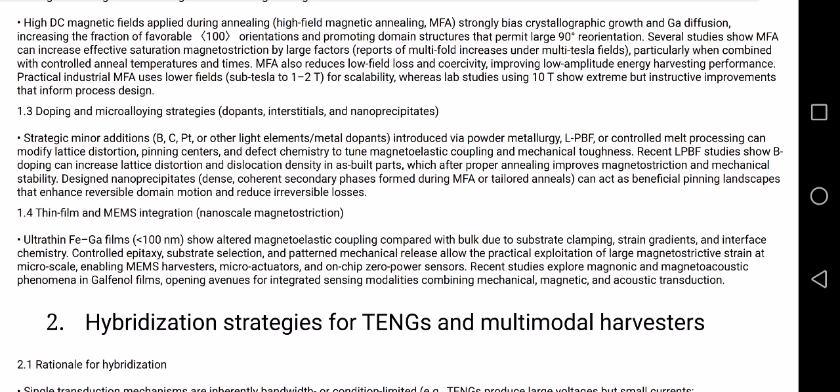Next we have thin films and MEMS integration. At very small scales, things behave differently. Ultra-thin FeGa films less than 100 nanometers experience substrate clamping, strain gradients, and modified magnetostriction. Solutions include controlled epitaxy, smart substrate selection, and patterned mechanical release. This enables MEMS harvesters, microactuators, and on-chip zero-power sensors.

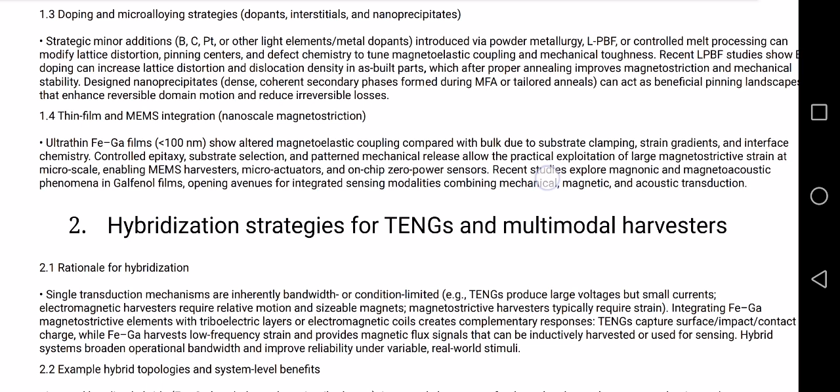New research also explores magnetoacoustic and magnonic effects. Now, next we have hybridization strategies for TENGs.

Why is hybridization needed? No single energy harvesting mechanism is perfect. TENGs provide high voltage, low current; electromagnetic harvesters need motion and magnets; magnetostrictive harvesters need strain. Hybrid systems combine strengths. FeGa plus TENG captures both surface charge and strain energy, increasing bandwidth and improving reliability.

Next we have hybrid topologies and benefits. Examples include layered bending hybrids with better contact mechanics, providing simultaneous triboelectric and magnetostrictive output. Cantilever hybrids with coils combine fast TENG pulses that charge capacitors with slow FeGa signals for power electronics. Multi-modal arrays harvest energy from many directions, providing redundancy for sensor networks. Experiments show multiple-fold improvements in output and duty cycle.

Next we have artificial intelligence integration. AI for materials discovery: AI models predict Curie temperature, predict magnetostriction, and optimize composition and processing. Techniques include machine learning, graph neural networks, Bayesian optimization, and DFT plus AI pipelines. This saves years of trial and error and identifies non-obvious dopants.

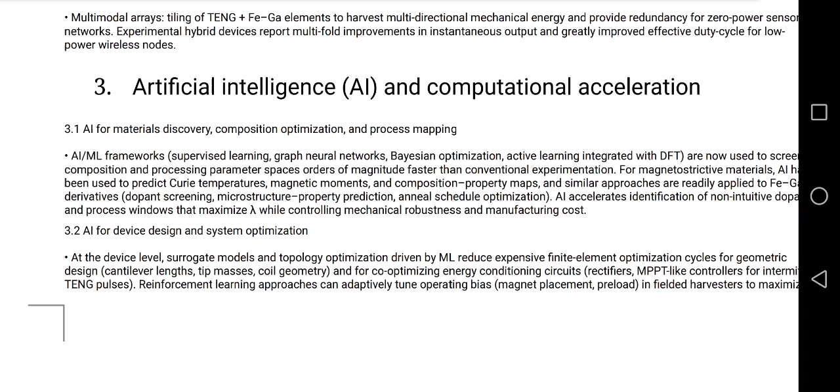AI for signal processing: hybrid sensors produce complex signals. Edge AI and tiny ML classify vibration patterns, detect failures, and reduce data transmission. This saves energy and improves network lifetime.

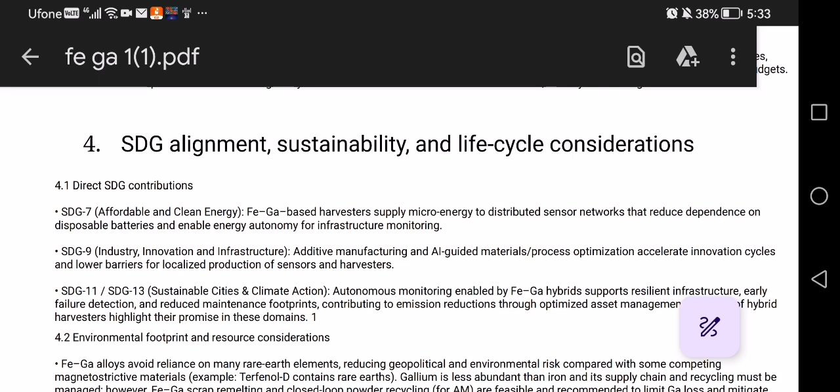SDG alignment and sustainability: Sustainable Development Goals. FeGa hybrid systems support SDG 7, SDG 9, SDG 11, and 13. SDG 7 is clean energy via harvesting energy. SDG 9 is innovation through additive manufacturing and AI. SDG 11 and 13 are smart cities and climate resilience.

Environmental considerations. Advantages include no rare earth dependence and recyclable FeGa alloys. Challenges include managing gallium supply; closed loop recycling is recommended, and life cycle assessment is required before large scale deployment.

Limitations and risks: bandwidth constraints. Magnetostrictive harvesters are resonant, but real world vibrations are random. Solutions include hybridization, non-linear designs, and multi-stage harvesters.

Degradation and fatigue: risks include mechanical fatigue, corrosion, and gallium segregation. Solutions include protective coatings, conservative stress limits, and long-term testing of 10^7 to 10^9 cycles.

Manufacturing variability challenges include porosity in AM parts and segregation in cast parts. The solution is strong QC pipelines using ICP, XRF, EBSD, CT scanning, and magnetostriction testing.

Next, power electronics challenges: hybrid outputs are difficult to manage. High voltage TENG pulses and low voltage magnetostrictive signals require specialized rectifiers, ultra-low leakage circuits, and adaptive switching.

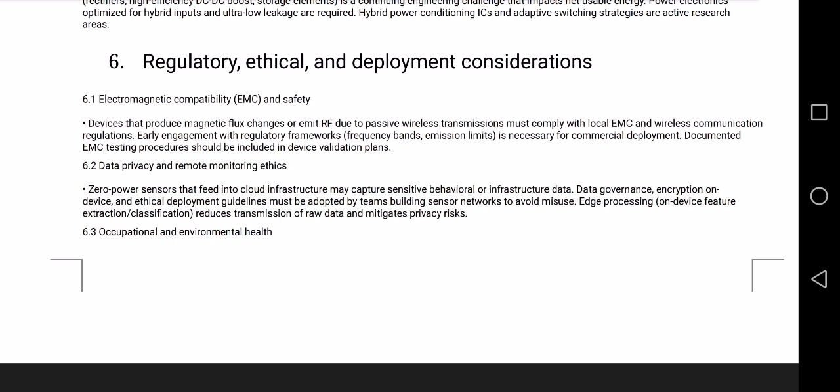Data privacy: zero power sensors may collect sensitive data. Solutions include device encryption, edge processing, and ethical deployment policies.

Occupational safety: handling gallium powders requires PPE, ventilation, and safe disposal plans.

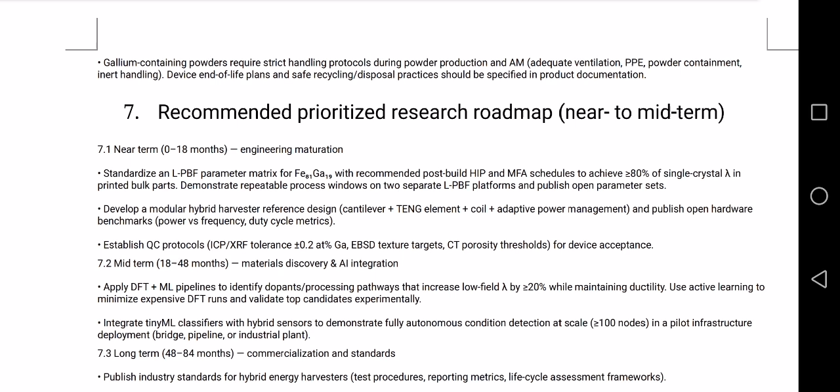Research roadmap. Near term, 0 to 18 months: standardize LPBF parameters, publish open reference designs, establish QC benchmarks. Mid-term, 18 to 48 months: guided dopant discovery, pilot infrastructure deployments, autonomous sensor networks. Long-term, 48 to 84 months: industry standards, closed loop gallium recycling, commercial scale production.

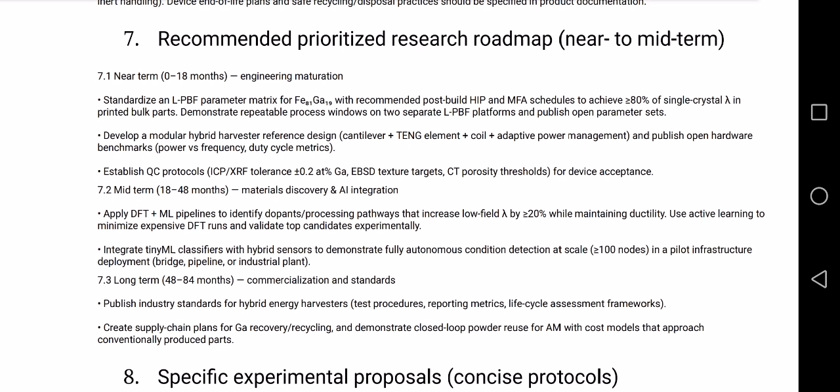Now to conclude: FeGa stands at the intersection of material science, manufacturing, AI, and sustainability. Additive manufacturing enables complex designs. Hybrid TENG integration enables zero power sensing. AI accelerates discovery and optimization. Sustainability and regulation guide real deployment. The future of FeGa lies in interdisciplinary collaborations, and that is where our future generations come in.